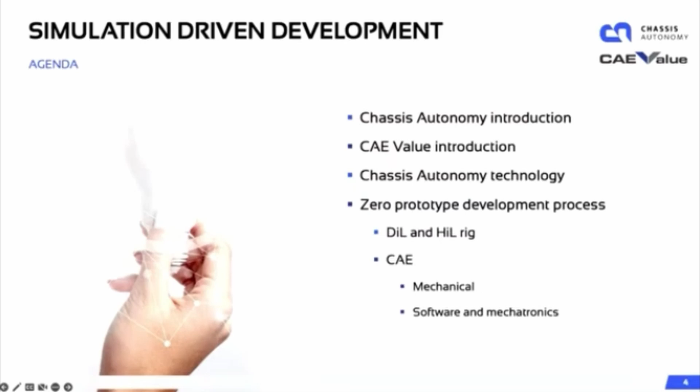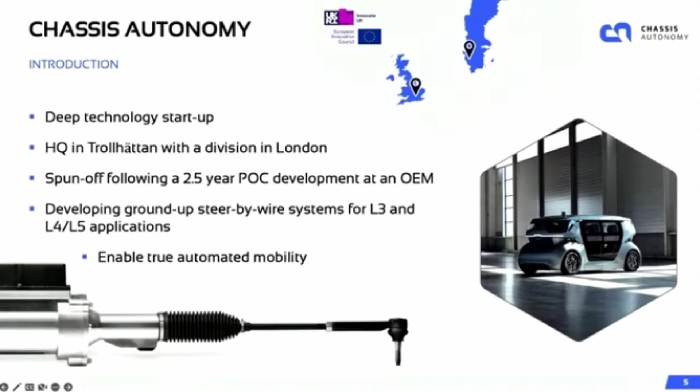So we developed a new division within the OEM, and we started developing steer-by-wire and brake-by-wire specifically for autonomous vehicles. 2.5 years later, we achieved proof of concept with that fail operational steering system, equipped to that test vehicle there, front and rear axle, and until quite recently that was still being evaluated around a test track up in North Sweden. We spun off that technology specifically. We're an independent company, and really the vision is to enable autonomous mobility through the provision of fail operational actuation systems.

We've had significant traction in the short period we've been operating - significant government grants from the European Union and the UK, significant financial investment from private investors. We've got key strategic partnerships, like the one we're talking about today. And that's significant traction, meaning now we're not just focusing on level 4, but we've got customers for level 3 applications. So we're developing and deploying the road wheel actuator with a hand wheel actuator for human-driven applications. That's something we didn't envisage when we spun off the company. But such is the traction and the technologies we've got, there's demand, and we intend to fill that. So our original tagline was enabling true autonomous mobility, but now it's enabling true automated mobility, because we're also looking into highly automated level 3 applications.

So that's a little bit on chassis autonomy. I'll hand over to Johnny - he'll tell you a little about CAE, and then we'll move on to steer-by-wire.

Thank you, Tom. Hello everybody. I'd like to start with a small story. Many years ago, in 2005, we founded our company based on the vision to help our customers extract as much value out of simulation as possible. Our customers were typically Adams users - I myself have used Adams since 1992. So we have a lot of Adams activities, and we started with that in 2005.

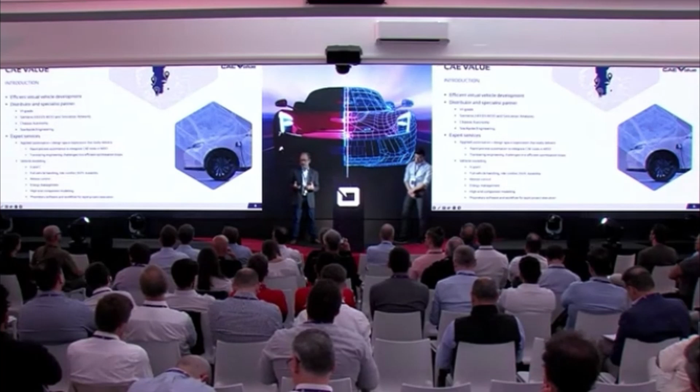We have a very strong technical team. We're about 20 people in the company, most of us engineers and simulation CAE engineers. Over time we've built a lot of experience doing two things really well. The first is taking optimization and making it actually deliver in vehicle programs, taking it from mostly research activities to something you do on a daily basis.

The other thing we do is help our customers put that into actual work and automate their CAE processes. The second thing we do really well is model any vehicle in great detail according to what's needed in each phase of the vehicle program. So we do vehicle dynamics, NVH, durability, motion control, energy management, and things like that. And of course we developed some in-house tools over the years to make our process more efficient.

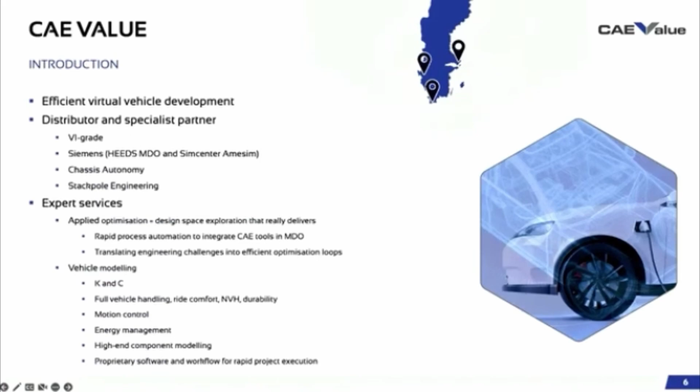Over to you, Tom. Thanks, Johnny. So a little bit about the technology. When we remove the mechanical connection, either from the steering column or the brake pedal, we need to make sure the system's functionally safe. This has been talked about for the last 20 years. Technology is slowly getting there, but there's still struggles from the legacy tier ones. Ultimately, our challenge is to develop the world's most safe actuation system, braking and steering.

Our focus currently is on steering, really underpinning the design, the concept, by functional safety. To do that, we've assembled a world-class team. We've got headquarters in Sweden, an office in London, and other engineers across Europe. Where we can't get the talent in our local division areas, we'll go elsewhere to make sure we can get the best people in the world. So that's the world-class engineering team that we've got.

When we start to actually look at the design, because we're not a legacy supplier, we don't have manufacturing facilities across the world, we don't have to carry over existing technology, we can design from the ground up. So we can have a functionally safe electronics and software concept, and that's exactly what we've got. When we look into the mechanical design, again we design from the ground up. We eliminate conventional concepts, we eliminate the established parallel axis drive, which has got a belt drive, a single point fault of failure, which is really catastrophic for a by-wire system.

We also look into the concept, and again, for a steer-by-wire system that doesn't need a mechanical connection by definition, why do we want to carry over a 16th century technology such as the rack and pinion? Again, we delete that. What we end up with is a very robust design, mechanically robust, functionally safe in terms of electronics and software, and a system that's specifically designed for use in by-wire applications.

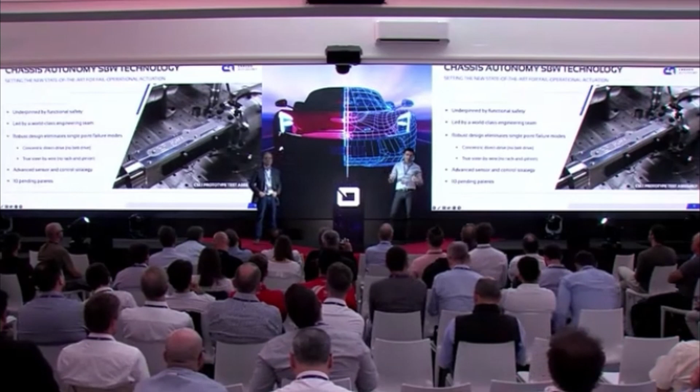Added to that, the sensor concept. The design has an advanced sensor concept and control strategy that makes sure we have plausibility and redundancy. In most events where we have a system fault, we revert to an alternative operating mode. We maintain steering functionality, steering availability. Everything we've designed in the concept and the product, we've got 10 patents pending. If you ask me tomorrow, that'll be 13. So again, we're pushing the boundaries, we're creating new technology. There's clear white space around what we're doing.

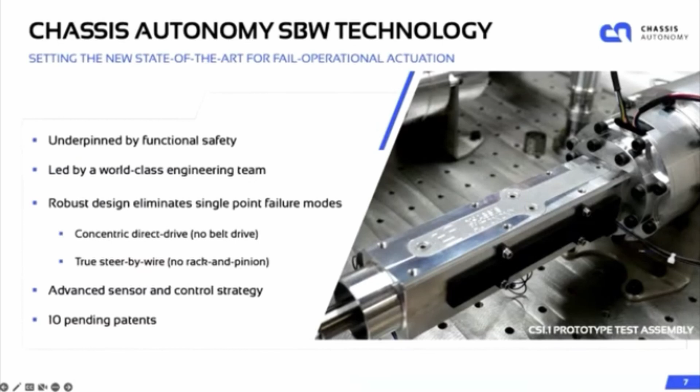Moving to level 3, we've developed a functionally safe product on the electronics, the software, and the mechanical design is robust. The next critical challenge, I think, as we all know, is steering feel. How do we make sure we translate the road feel into the road wheel actuator, through the wires, up to the hand wheel actuator? That's the biggest challenge as we move into level 3.

And that's really where the partnership with Johnny, CAE Value, and VI Grade really helps us to accelerate the development through the use of hardware-in-the-loop simulators, to really advance the development of the system, the algorithms, the software, before we even need to manufacture a prototype and put that on a vehicle. That really advances time to market and reduces cost.

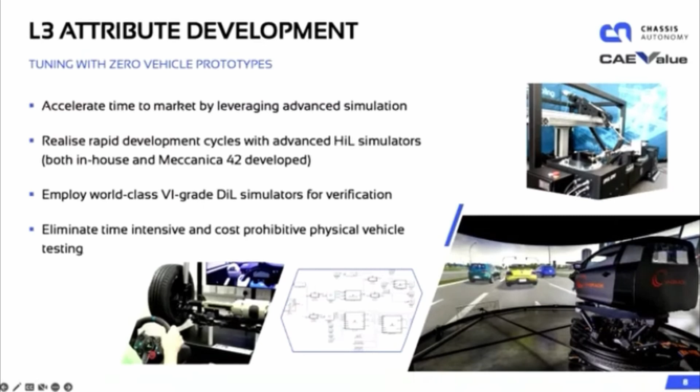It's fundamental to how we need to develop products. And that's pretty much why everyone here today is here, because of the zero prototype concept, and we're fully bought into that to develop the product.

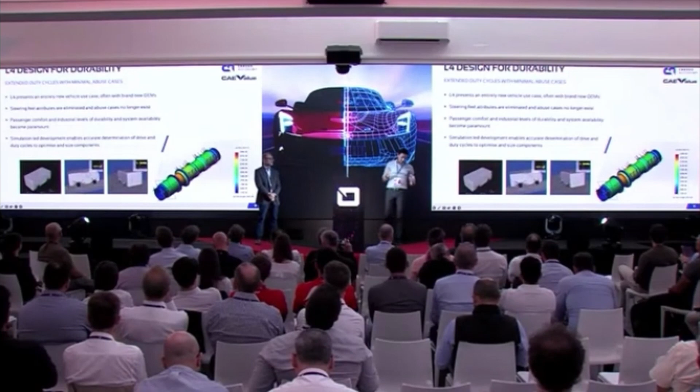Level 4 is a little bit different. We've got the road wheel actuator. We don't need to worry about steering attributes - they're out the window. Same case with abuse cases. The human driver, that 1%, we don't need to worry about that. So we have a different design case, a different duty cycle, different road loads potentially.

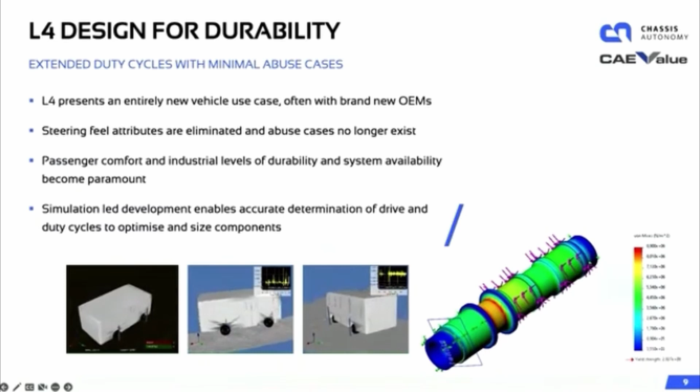And we're also working with, in most cases, pretty new startups - well-funded startups, lesser well-funded startups - companies that potentially don't have the road load data, the design data to feed into requirements to allow us to optimize the system. So again, through simulation, we can capture that road load data from ODDs, we can define duty cycles, we can optimize the system, make sure it's designed specifically for that application.

And now over to Johnny, he'll talk a little bit about the digital twin and really how we're crossing the divide between the hardware in the loop and the software.

Thank you, Tom. So I'd like to say a few words about what we call a digital twin of the steering rig. We have developed this model in Adams to be able to very, very precisely predict which will be the controller inputs and output signals, and what that means for the setup of the actual test rig. And then, of course, we can look at how do we optimize the feedback torque, how do we take into account the excitation coming from the wheels, from the tire model, and overall system dynamics.

So we can use this model to prepare for when you put the human in the loop, in the rig, very accurately. So we save time simply in the development by doing this.

And the other thing we can do with this type of model is, before running the actual physical durability verification, look at how this duty cycle should look and what kind of excitation we should use in order to minimize the physical testing time needed for verification purposes.

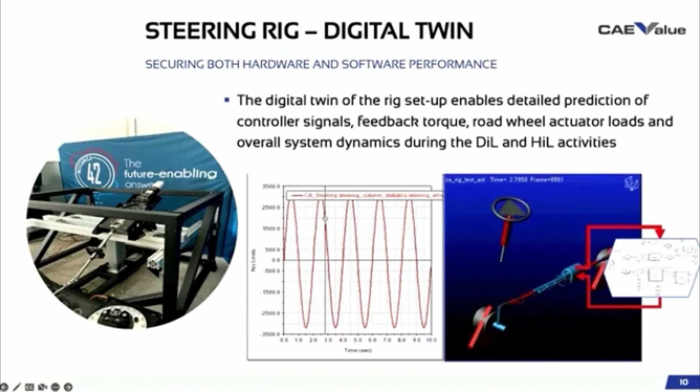So now I would like to talk a little bit about the challenges that chassis autonomy will see as a supplier.

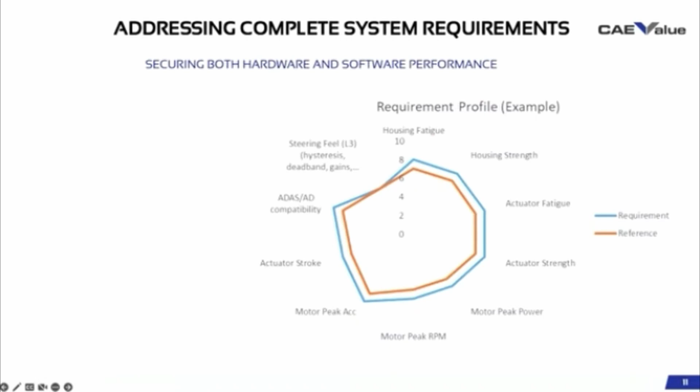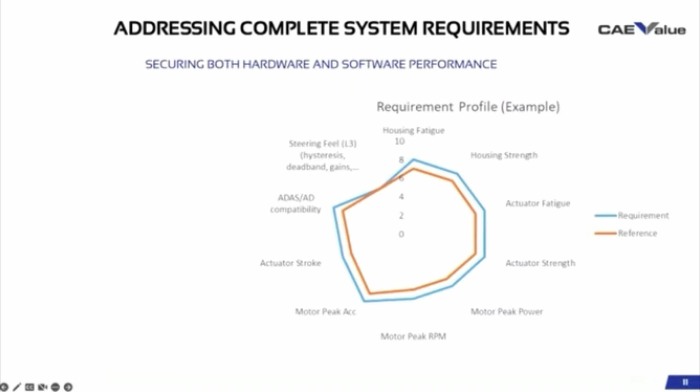There are multiple different parts of this steering actuator that need to work together. It needs to be durable enough. The housing needs to be able to take shock loads and fatigue loads. Same thing goes with the actuator itself and all the internal components. On top of that, you have a mechatronic system which needs to function properly and give enough performance, including the electric motor performance. So it's a lot of different things that need to fulfill multiple targets simultaneously, because there's no time to look at each individual component sequentially.

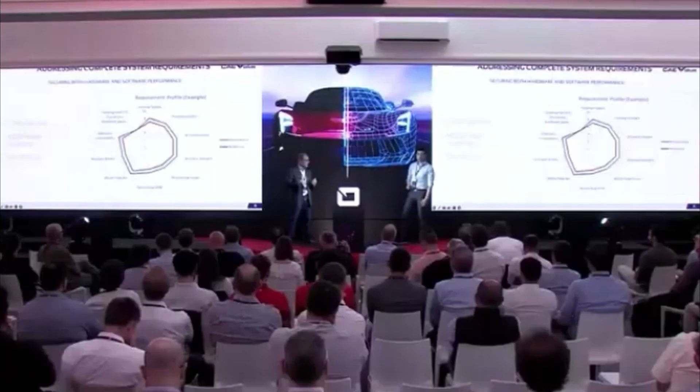So in order to overcome this, we're putting into place, helping chassis autonomy to put into place, the right tools, the right methods, and prepare all these different models for a subsequent multi-objective design optimization, which we know will happen.

So for that, for example, we have Adams models provided by Hexagon. We have VI-CAR models that will be used both offline and online in the steering rig. So there's a lot of things that will work together. And of course, once we start running the virtual multi-domain optimization, we use HEEDS MDO for that, clearly.

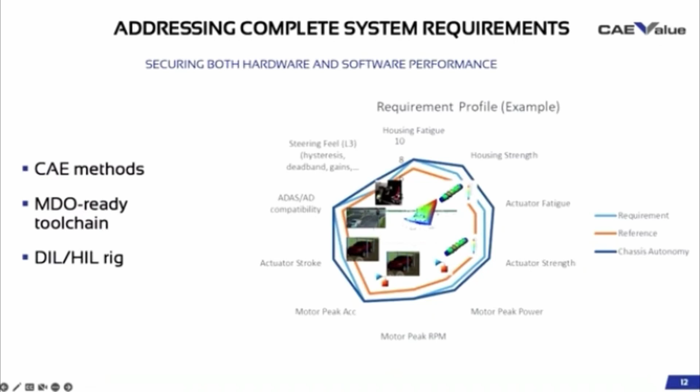I think with that, I would like to hand back over to Tom.

Yeah, so I think just to summarize, this is a key partnership for all three companies. We will have a hardware-in-the-loop rig up and running by the end of the year, hopefully earlier. Really that's focused on developing these rapid simulation cycles, focused on zero prototypes - that's what we need to do. That's how we accelerate development and ultimately bring steer-by-wire to highly automated level 4 and fully automated vehicles. As we move through that and execute that, then we start to focus on brake-by-wire as well.